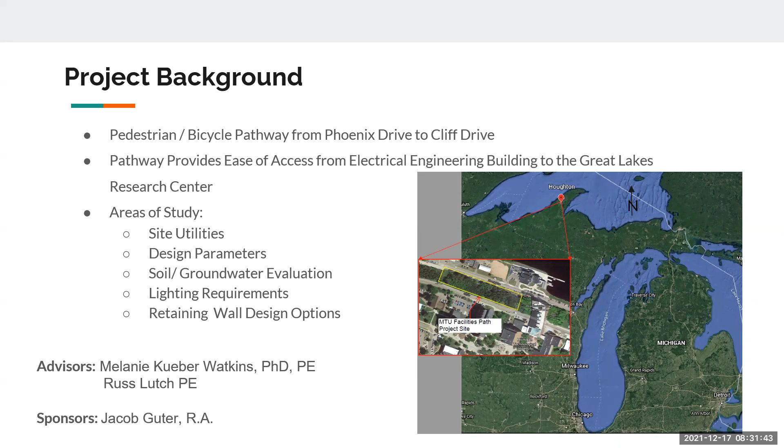So for the site layout of this project, as you can see, we're on the hillside in between Cliff Drive and Phoenix Drive. And then first off, we started picking out the laydown areas for this project. The 2 main parameters we had were that they had to be in close proximity to the site for easy access, as well as that they had to be easily vacated by MTU facilities management. So these 2 areas in orange are what we picked out. And then the second area is 20 parking spots in blue. These are blocked off for safety reasons. We felt that with how close those were to the project site, it could pose a danger to anybody parking there, with demolition going on a pathway right above it.

And then the pathway from top to bottom will be about 810 feet. And the relocation of utilities will not be necessary due to the pathway being designed around the steam tunnels. The steam tunnels are the only utility that was going to be in our way.

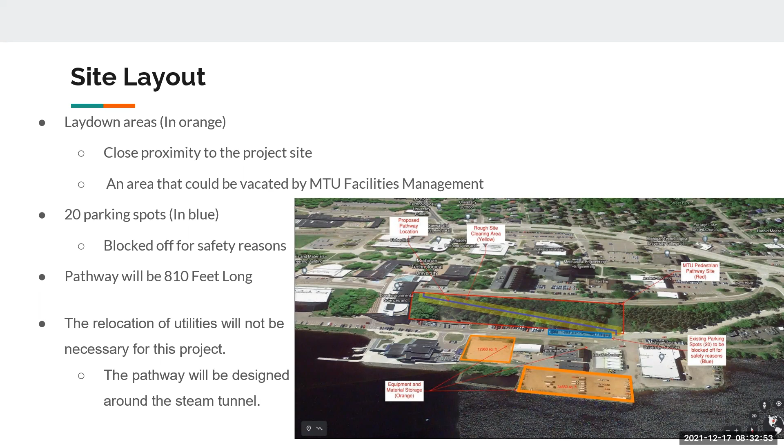And for the mobilization and site layout estimate and schedule, first, we used the MDOT spec book averages and used prices relative to the UP so we can get an accurate estimate. For the mobilization, we found that it'd be $80,000. This includes temporary power setup and equipment and material delivery. And then for the site layout, it was $9,800. Included in this was the utility staking, marking everything out before construction, as well as pathway location staking. So when the demolition crews and the clearing crews came out, they know exactly where that pathway is right up the hill.

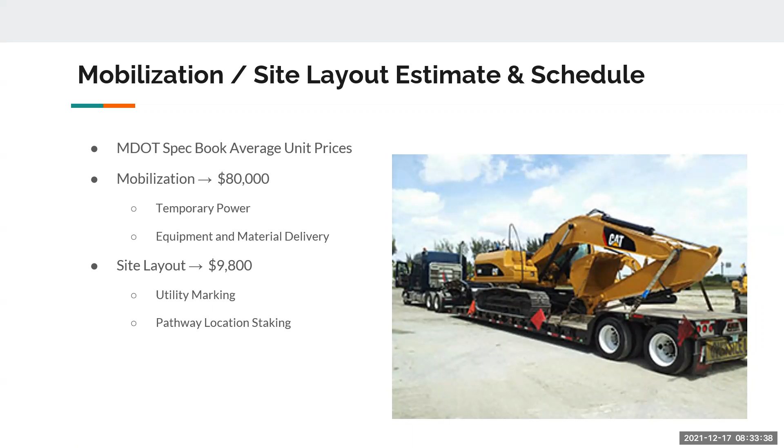As far as demolition goes, we originally planned for a clear cut, but then revised our decision because of permitting issues. So right now it's looking like 3/4 of an acre will be cleared. That's about 3,200 trees. This is with the equipment in mind and the movement that they will need on the hillside. This is what we feel would be a comfortable amount to be removed. Then there will also be a minimal sidewalk and curb removal down by Phoenix Drive, and that's about 15 feet. And then again, the pathway is about 810 feet, so there's going to be some rough grading and removal there. And you can see the proximity of the equipment laydown areas in this picture also.

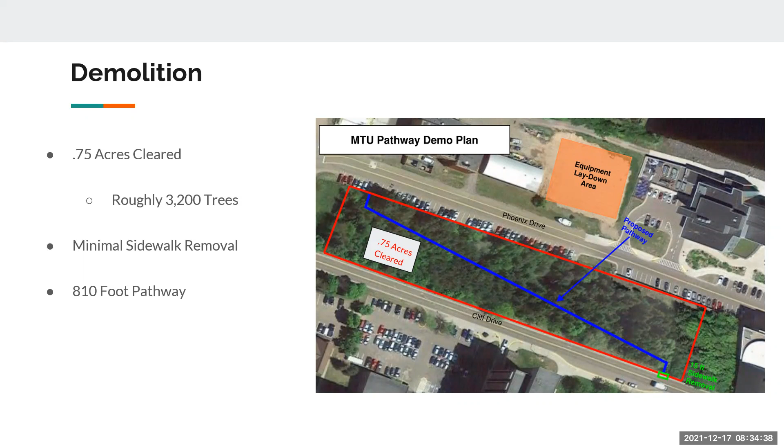As far as detour goes, we know that the HSTEM building is potentially going to be going on at the same time, so this was also with that in mind. There will be a potential for a flagger due to high traffic times in the mornings and afternoons of faculty commute. This won't be needed necessarily every day, but it will be on an as-needed basis. The main detour will take place on Townsend Drive, and that will also be in correlation with the HSTEM building.

Then as Ross talked about, there will be the 20 parking spaces removed. We feel this won't vastly impact the faculty, and these will only be temporary, and those will be given back as soon as possible, so that once we move from the bottom of the pathway, they will be able to get back in there. And then again, with the coordination with the HSTEM building, we will have a digital sign that messages can change on, so that the ever-changing planning with the university can be displayed and the route can be correct on there.

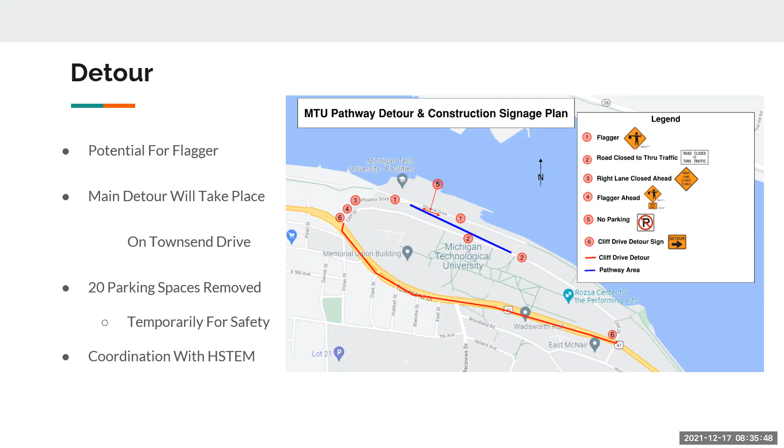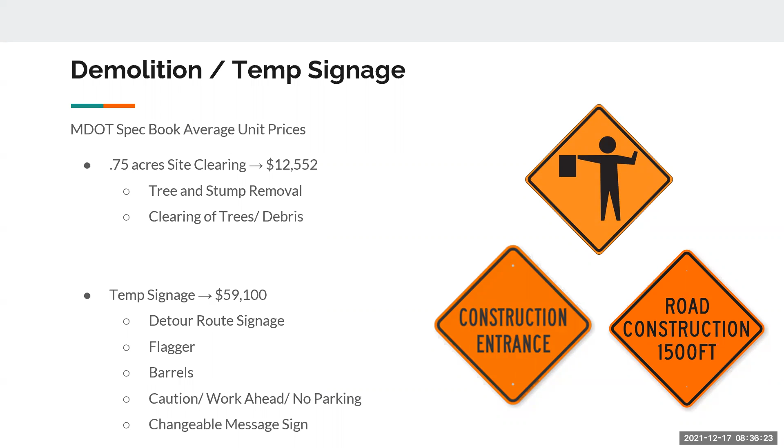As far as costs for demolition and temp signage, it came to about $12,500 for tree and stump removal, clearing, and tree debris. We again used MDOT spec book pricing based on averages for the UP. Then the temp signage was a larger number, around $59,000 because of the flagger potential, and then also that changeable sign, along with your typical barrels, your construction entrance signs, and those items, they do add up quickly.

As far as pathway lighting, we dug into this because we know the pathway wants to be used 24 hours of the day if needed, and then also in case of emergencies. So there will be lighting on the pathway. We did a calculation based off of lumens and height of the lighting, and looked at typical lighting that's on campus right now and spoke with Jake and what they recommended.

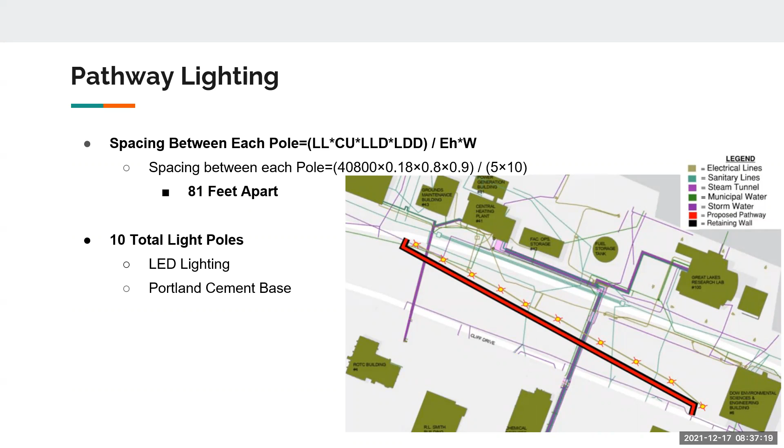For the soil conditions, conditions are obtained using the soil boring report done in 1995 for the Dow building. They classify the soil using the USCS system and classify it as poorly graded gravels, sands, little to no fines. We considered where these borings were done. Some of them are quite distant from where the path would be. So it is recommended to do more borings where the actual path would be.

Unconfined compressive strength is about 38 psi. That was determined from the results of the standard penetration test provided in the report. We also recommend the use of a 32-degree friction angle and a moist unit weight of 135 pounds per cubic foot. And the soil is very permeable because there is little to no fines in it.

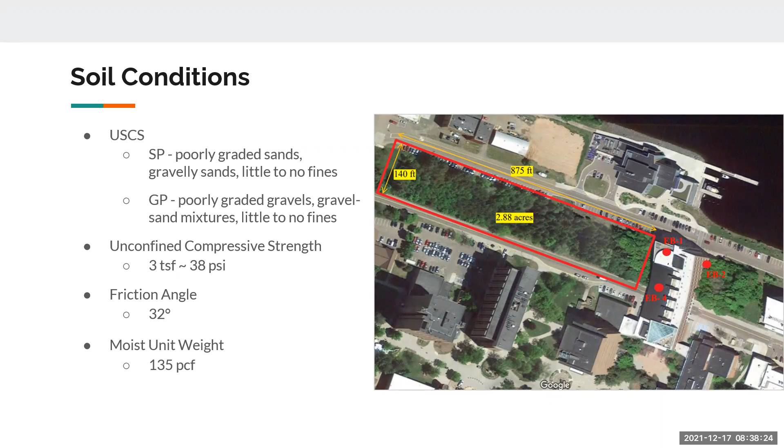For the groundwater conditions, the Lake Superior elevation, as you can see, the max and min hasn't fluctuated too much through the years. That was obtained using the U.S. Army Corps of Engineers data. The Portage Canal is around 600 feet, and that was with the north entry buoy from NOAA. The site elevation down at Phoenix Drive is around 615 feet, and up on Phoenix Drive is around 690 feet.

The groundwater is on average around 600 feet. This is because of the high permeability of the soil. It'll stay pretty consistent with the Portage Canal, which is fed by Lake Superior, and that should stay pretty constant. It should not affect any of our construction, because it stays about 15 to 90 feet below the site surface, and where it's 15 feet below surface, we don't expect to be excavating that deep into the soil.

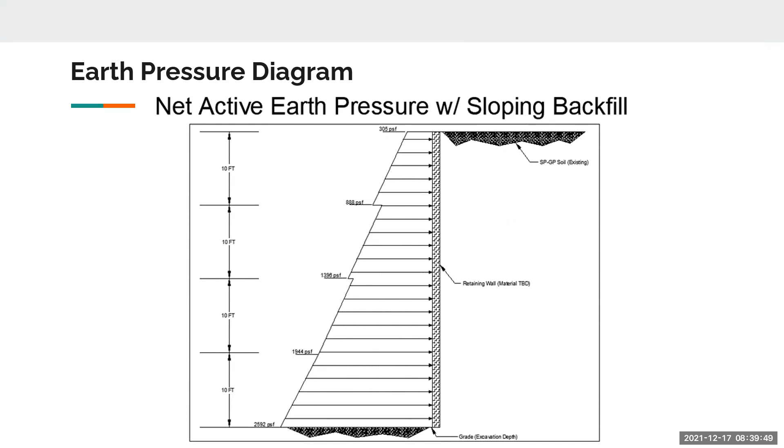Here's an example of the earth pressure diagram. This is including the sloping backfill and surcharge. It does not take into account water pressure because we assumed it would not affect that.

So for the site cut and excavation estimate, we also used the MDOT spec book average unit prices from 2020, and we increased the prices by about 2% for inflation, using Superior region prices to get a more accurate estimate. The earth excavation came to about $53,500. The cubic yards were calculated assuming a 15-foot cut along the entire path length, plus a 2-foot cut underneath that for the subgrade. So it comes out to about $17.50 a cubic yard.

For rock excavation, this came to $77,300. This was estimated at $68 a cubic yard. For rock excavation, we assume we might see rock. That's why we also recommended more borings. For the fill and the aggregate base, that's about $52,000 in place. And that was just estimating about half the total earth excavation that we need for fill.

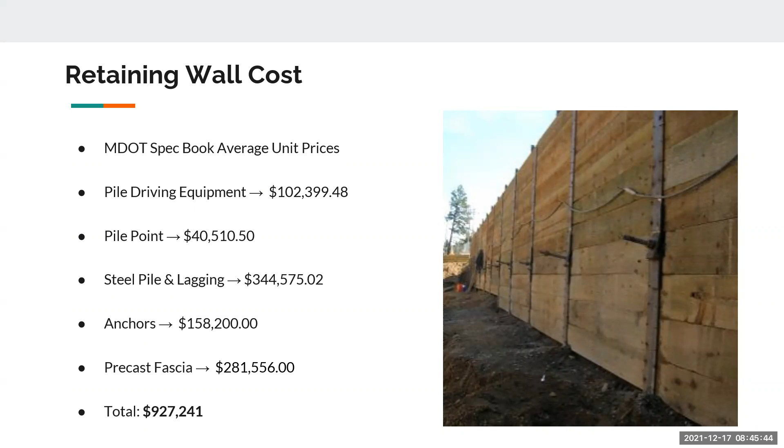As far as schedule goes, we know it's a large part of the project as it needs to be done more in the summertime due to less congestion on campus. So the project will begin in April with contract development and procurement and getting those lead times going. As we know, steel, like we talked about, is an ever-changing item in the industry right now. Along with starting site clearing around the beginning of May, right after finals for the spring semester, and that will take about a week.

Retaining wall foundations will then begin, and that will be a larger critical path item for the schedule, starting right after that site clearing, and then retaining wall excavation will then go on about 3.5 weeks after that 7-week start. And then paving will take about 1 week with the rough grading and then base going down. And then following that and the final touches, finish grading will be final inspection and project closeout.

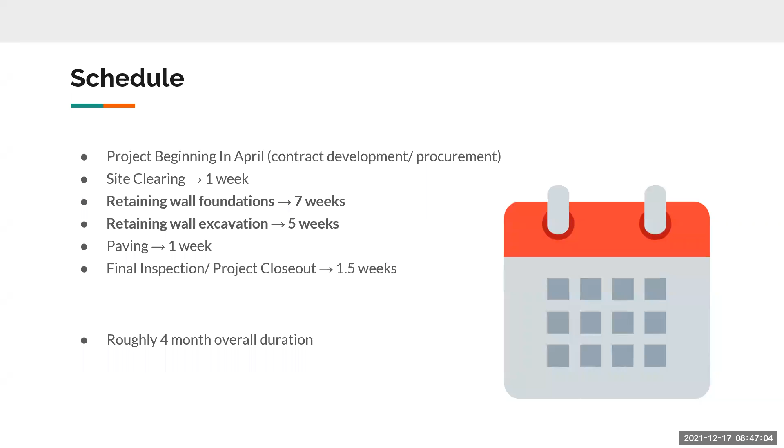We have about 1.5 weeks figured for that so that the individuals from the area who need to inspect will be able to come out and have enough time. That will give us roughly a 4-month overall schedule with a little bit of wiggle room in there.

As far as an overall project summary goes, you can see the finished design potentially of the retaining wall, as we talked about, some architectural precast. And then the overall cost for the project will be around $3 million. This is for alternate 1, which is our soldier pile retaining wall, as we spoke about before. Joe Engineering has alternate number 2. And the price of PTS Engineering's drainage is included in this number.

And of course, you can see the breakdown of the estimate on the side here, with the largest number being the retaining wall, but then coming in second is the contingency, which is figured around 30%, just for those unknowns in the project, along with retainage following that also being in there.

We figured the schedule on 3 crews with about 3 laborers and give or take some operators, so that they aren't all necessarily going to be on site at the same time, but at one point they will all be needed. So that's why we figured on 3 crews. So that gives a brief overview of the whole project with the 4-month schedule, the $3 million bottom line, and the finished look of the wall.

For our recommendations, we recommend that Michigan Tech get another soil boring test done. The previous one was done in 1995, so a few years back now, and it was also done a little bit east of the project site. So we recommend getting that done on our actual project site, just so we know for sure what we're working with below the ground surface.

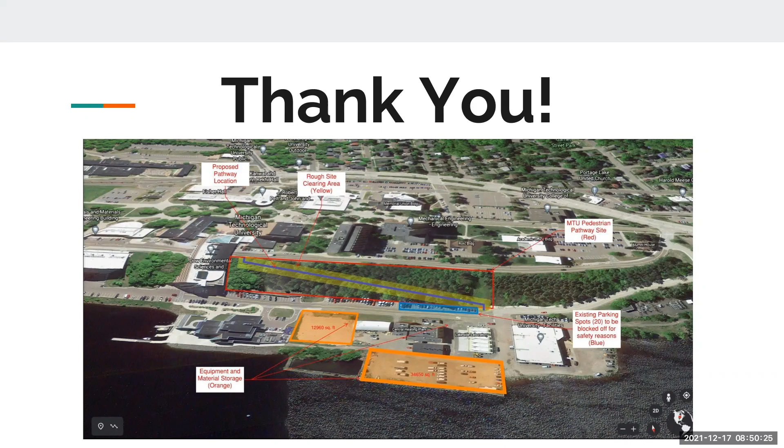I got another question. If you go back to your groundwater slide. Okay, you're assuming that the groundwater elevation is flat. And I think that assumption you cannot make. You have no idea what you're gonna encounter once you start digging things up. You may encounter springs. I don't think you're gonna have problems, but it doesn't mean you're not going to.

Did you look at any of the groundwater data from those 3 borings that were done? Yeah, they were all right around 600 feet. The ones up on top were, I want to say, 601 or 602, and the one on the bottom was like 600 or 598. Yeah, so that gives you a good indication. Now, when you're doing your borings for this project, how many borings do you think you're gonna need?

That's a great question. My assumption coming into it pretty blind would be 4 in total across like a quarter of the path, kind of section it out, just to kind of get the full feel of the overall width of the path. That's probably pretty reasonable. How deep do you think you should go?

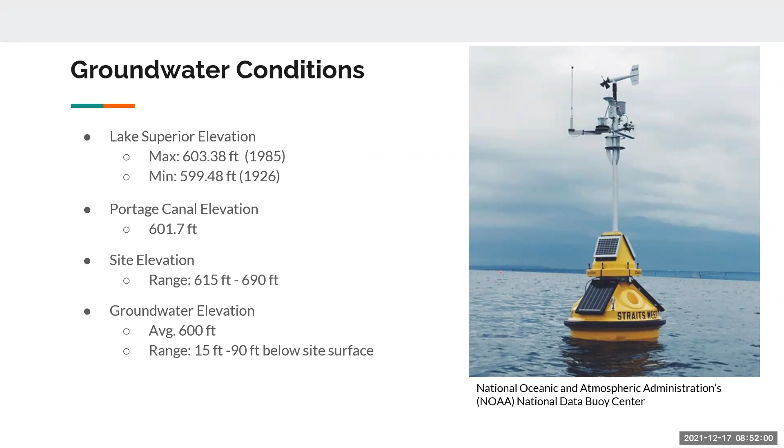You probably want to find that groundwater, right, to make sure that we're not in it. So if we're roughly thinking it's about 600, yeah. You want to make sure that you're not gonna encounter anything crazy across the cut. How deep are your piles? So it'd be 10 feet below the surface, so roughly 25 feet is the overall length. The lower one, by the time we cut that down 15 feet, it'd probably be about 17 feet down below the surface level, max. So if your borings are 25 feet deep, you should be okay. Thank you.

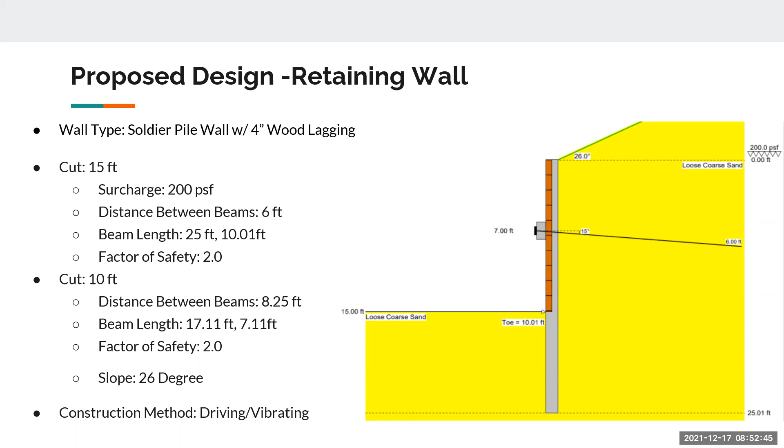Maybe, I don't know if you remember, so it's like 27. So before, the total cost was below. And the total cost, 1.8, this was 3. I wonder if you could comment on the difference in cost. Yeah, so I was thinking about that when I was actually sitting through the presentation, expecting a question similar to this. So when we're looking at our overall breakdown, I believe our contingency is larger than theirs just because we had more involved in it. I don't believe they took equipment into account. Possibly they did in the constructability of the wall, but we did as well.

But the overall site development, including the leveling of the slope of the hill and stuff for the constructability of the wall, is something that we had in the site prep, including the clearing and so forth. So I think our equipment cost is considerably larger than theirs, as well as our wall costs. And you saw that in our evaluations, close to $1 million. I believe theirs was closer to 600,000. That precast finish just adds a lot to the overall wall cost design. How much do you think that precast adds? It adds about $200,000 to the overall layout, just the putting it on and placing it and having the work involved with it.

We also assume for our wall, and we know this assumption is wrong, that there was a 15-foot cut across the entire duration of the path. It's not going to require a 15-foot cut, right? So you're going to lose value in our estimate based on the material cost required for the wall, as well as the time and labor involved in the constructability. So I think for our overall wall design, you might see that value drop closer to that 800,000, 600,000 valuation. Yes, it's a very conservative estimate, so it's within reason, but I also believe they have fewer crews, and I don't know how they necessarily calculated it.

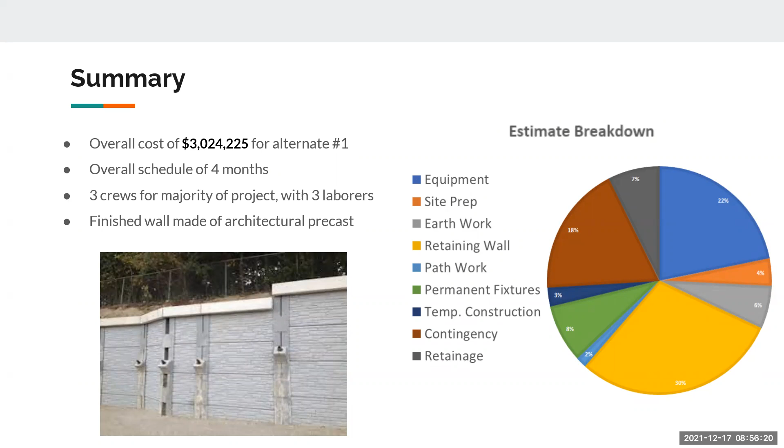Nice job. Thank you. Thank you for this opportunity. Should I stop recording? It was a lot of fun to work on it this semester. It was a cool project, close to home. Yes.